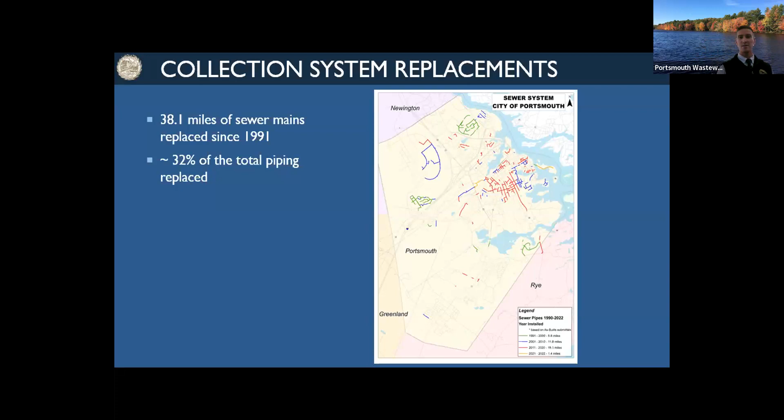The next thing we have is we'll understand a little bit about pump stations, which is a topic we'll talk about later. What are pump stations? They take water from one zone and pump it somewhere else. A lot of times we try to use gravity to move the water around, but you get to the point where it's too deep in the ground to be economical - our pipes should only get 20, 30, 40 feet deep. So what we do is put in a lift station, which lifts the water up higher so it can then flow by gravity to some other zone.

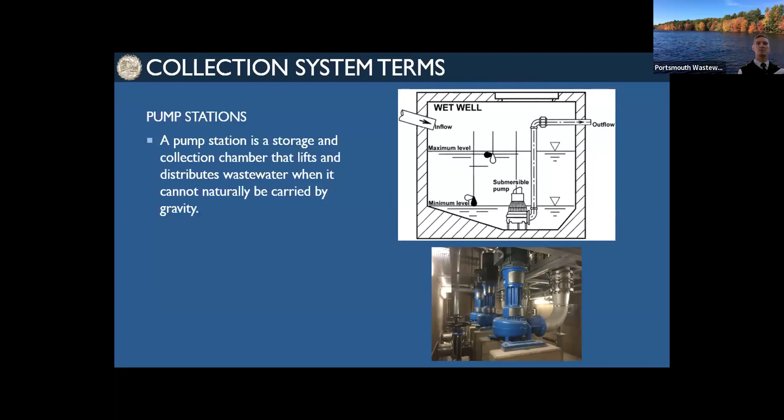We have about 20 stations, and we're going to add a couple more in the future. These are big assets that Shane has to manage all the time. They have recurring costs, require maintenance, and are labor intensive to manage.

All right, so combined sewer - this is a big hot topic. We want to just define the terms. It's a combination of stormwater and wastewater that all goes to a common pipe. Most of the time it flows right to the wastewater plant, and that base flow, up to a certain amount, gets treated and captured.

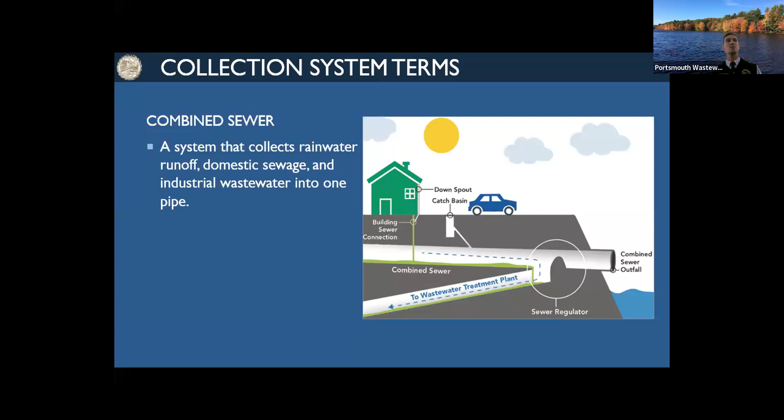What happens in a CSO is the system gets overwhelmed. This is one pipe in the ground, and a lot of these are antiquated, so they don't have the capacity to convey all the stormwater and wastewater flows. So a portion of that gets discharged to receiving water - in our case, the river and the mill pond. This is a problem for a lot of communities in the US.

There's over 700 communities with CSOs, and we have some good information on our website about our compliance and how often we've had CSOs. We have some new notification systems and new dashboards so the community can be more aware of the real-time status of our system.

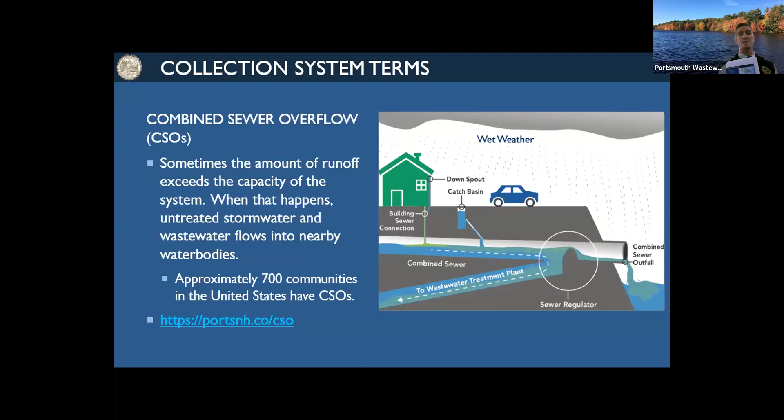I think a big question we've been getting is why do we still have CSO events? We've put a lot of money and investment into the system - why do we still have these events?

What we've been seeing is more frequent, intense rain events - that's intensity. If it rains all day, often it's not a problem; it's when you get 2 inches in an hour that it overwhelms our conveyance system, because we still have these antiquated pipes that aren't capable of conveying those flows. The reason for the CSO point is to have a relief point so it doesn't come out in basements or in the street. If you don't contain it and direct it to a location, it's going to come out where you don't want it to.

So what's discharged during a CSO event? Our base flows are about 2 million gallons per day, and in a wet weather event that goes to the treatment plant is about 6 million. So 90% of this CSO water is actually stormwater, and most of the wastewater itself is water anyway.

That being said, what's coming off in these CSO events? You have wastewater, which is a fraction of it, but then you're also getting road runoff, fertilizer runoff from parks and other grassy areas, and pet waste getting washed out. A big concern in a lot of communities is wildlife near these water bodies - geese and other waterfowl become a real problematic thing when you're looking at beach closures and contamination of water bodies.

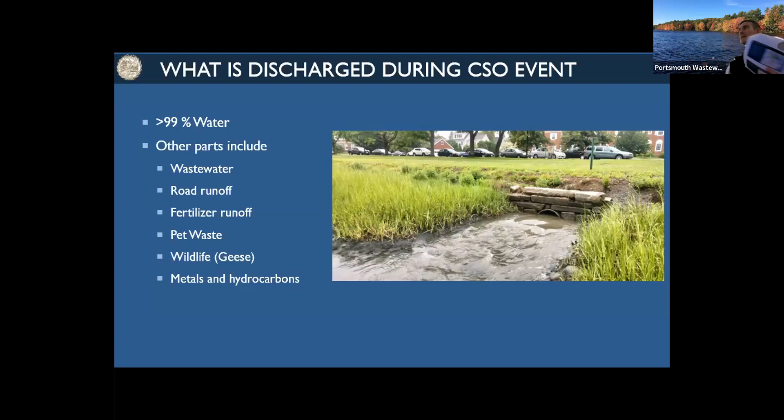It's a fun fact that a goose can produce 1 to 1.5 pounds of fecal waste per day, so when you think about the amount of geese we have around here, it can become problematic. Then there's also metals and hydrocarbons from runoff off roads and streets. So all of these are constituents of CSOs - it's not simply wastewater.

Just another fact, as we were putting this presentation together, typically in this South Mill Pond area, for every inch of rainfall we get about 3.7 million gallons of stormwater runoff in the basin. So there's huge volumes of runoff that are generated in this area.

Okay, we're going to go through some of the projects that we've completed in the area. Combined systems are the primary driver of these CSOs. We have a lot of combined systems, but as you can see, we've really taken care of a large majority of those combined piping systems. A few of them are still ongoing.

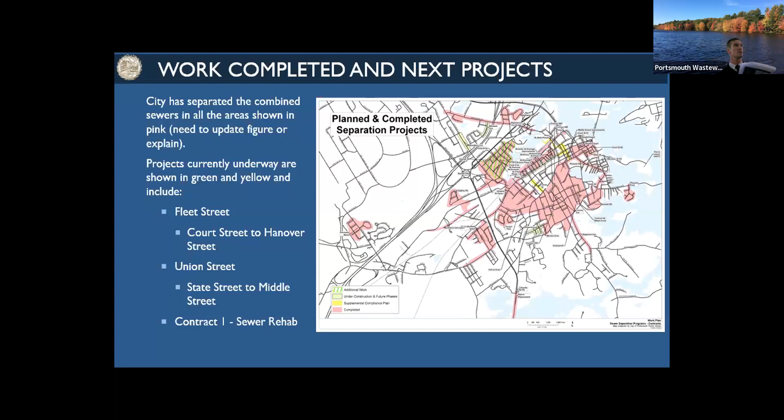So being systematic is important, because it's better to evaluate what data you have, plan a project, but then come back and see what the results were. Because a lot of times there are other things that are still contributing to CSOs or other CSO events.

Just a couple facts on how we've progressed over the past 20 years or so. Since 2002, there have been 28 major sewer projects. There's a whole number of smaller ones, but about $194 million of total sewer capital investments. A lot of that is in the Pierce Island wastewater treatment plant.

But approximately of that 194, about 70 million is CSO related, CSO specific. That would be separation projects, infiltration related projects, things like that. And as you can see from this, there's approximately a 90% reduction.

It depends really on the weather patterns. In the early 2000s, you see some very high events, and they were kind of wet years. But also the data, as you get older and older, we didn't have good data to understand what the volumes and flows were. I think what I heard is that there was a kind of board that they used.

So if it got moved, that was the indication that there's a CSO. Nowadays we have better technology, better tools to understand what's actually going on in the system. But it does show you that we have been working to steadily address some of these CSO flows and events.

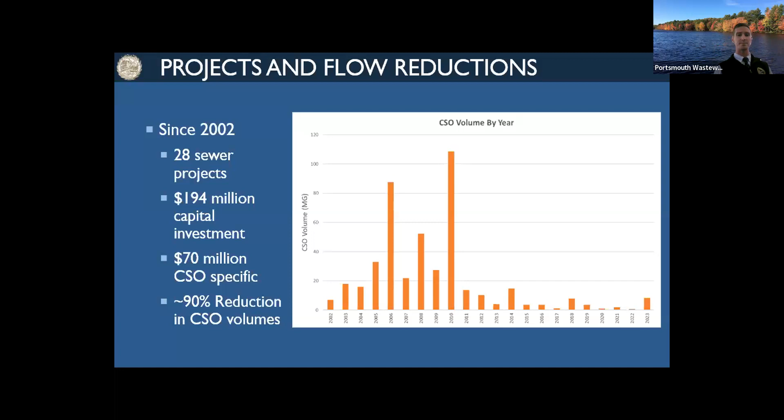But there's been a significant reduction in street flooding and also basement flooding. This wasn't like a thing that happened once a year, this was happening very regularly based on the precipitation events that we got. So that's an important thing to consider, CSOs are not ideal, flooding is not ideal, but in terms of the amounts and frequency, it's dramatically decreased over time.

All right, big one is, so when will CSOs be eliminated? I would say we don't have a firm date, we can't put a pin on it and say it will be done by this date. Like I mentioned before, we have a supplemental compliance plan, which is our target and our framework to work towards removing these CSOs, but it's a long-term process.

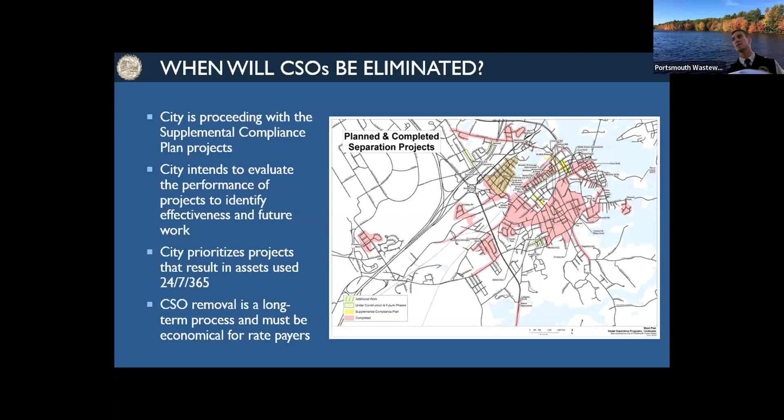All right, so the big one too, and I think we got a lot of feedback on, is how do we get better notifications out to the community? So we have a vendor that helps us with CSO reporting and monitoring. They also manage the rain gauge system.

And so we have new tools available to us, a real-time dashboard on the city's website now. So if you're interested, go to the city's combined sewer overflow website, and we have a real-time map of all of our CSO locations. You can click on each point, you can see when was the last time it had a CSO, what have been the volumes in past periods of time. It's kind of like, has it overflowed in the last 48 hours, and such - those are right there.

We're implementing a new notification system itself. So we're trying to automate subscribers to make sure we don't miss people, and we're getting notifications out effectively. We have systems in place that we can verify it's not false - we had a couple of those where there was a sensor failure. We just don't want to say, oh there's a CSO, but there's really not. So we have some tools in place, additional monitoring and data, that we can say, okay, this is a real thing, let's make sure everyone's aware of it.

They're going live this week. So I think anyone who signed up on our website can expect to get a notification saying, hey, the system's going live. If you want to still be subscribed, great. If not, you can unsubscribe - there'll be a way to do that.

Another thing to emphasize, and I know we get some comments on it, is the old systems - they met our regulatory and reporting requirements. So it might not have been the preferred notification method, but we still met our requirements. I think there's always room for improvement, and I think this is a good tool where we can get a little bit more information out to people and be kind of responsive and respect people's requests.

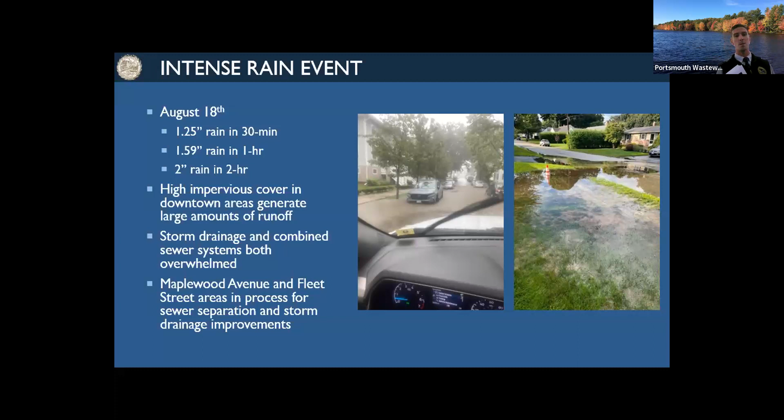Next is the Mechanic Street Pump Station. This has taken up a lot of our city's time and our staff's time. It's the city's biggest pump station, and it's been a real challenge. I think it's a visible mark that we're having some issues in our conveyance system.

This station was originally constructed and has had a series of upgrades in the 70s, the early 90s, and then the 2000s. Right now the current big pumps are about 500 horsepower, manufactured in the early 90s era. We've had some pump failure issues.

Right now we ship them offsite. I think a lot of the community was notified. These are big pumps - this is just the motor and impeller, the upper unit. They got shipped off-site. A lot of these parts are made in Germany, handmade or custom manufactured. Some of the parts were taking 4 months, some have taken up to 6 months.

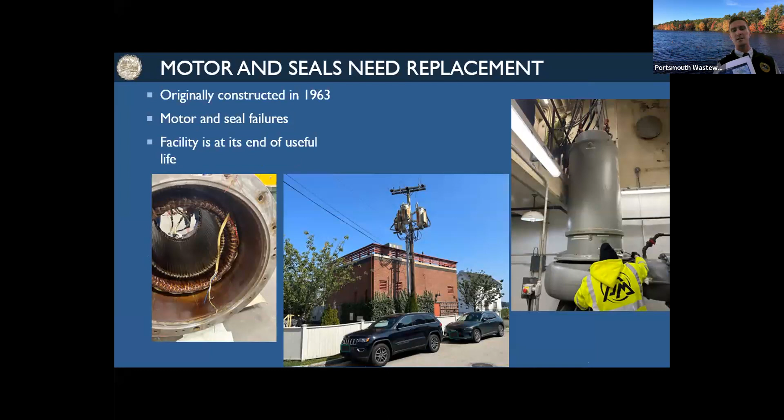The rebuild is in process, but as we're rebuilding, we found some additional electrical issues. Going back to this stator, each one of those little wires - there's thousands of them - is hand wound by hand. That's still in process, and it's projected to take another 3 months, because this is custom stuff where you're slotted in the queue with hydropower generators and a bunch of these weird one-off custom pieces of equipment.

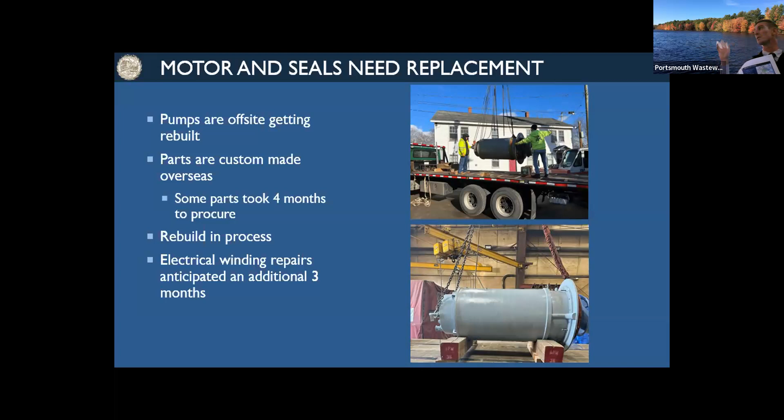In wet weather, the flows come up and we need to pass additional flow, that's where it is. The tarps there are a little unsightly, but they have insulation and we have heat trace wires to make sure the pipes don't freeze. It's not ideal, but it keeps the pipes flowing and ensures reliability of those specific units.

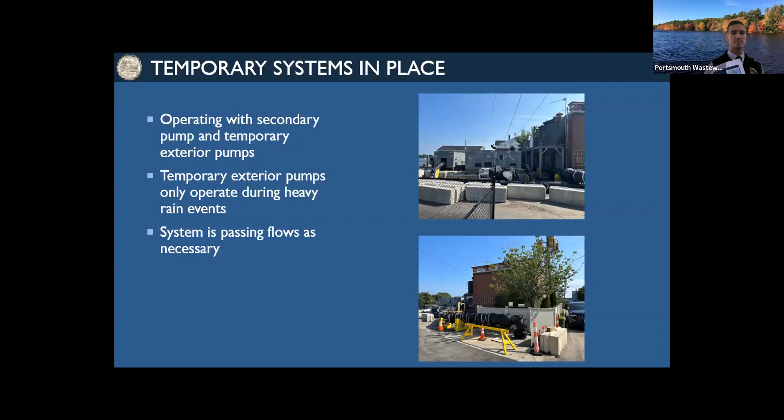It was unfortunate, an untimely failure of the equipment because there's a current project underway - we're at the 90% design level, working on parts repairs, upgrades, and reliability improvements at the site. This is sort of an extreme failure example. I think what we've learned is that probably a more comprehensive upgrade is necessary versus just a parts or electrical component replacement.

So I think right now we're recentering our path forward and probably need a more involved public process to define a bigger CIP project for us. This will come out to the community, and we'd like feedback on our proposed options forward. Right now we're trying to get the parts replaced just to get the facility back online, but then we'll come back out and talk more about a possible comprehensive project.

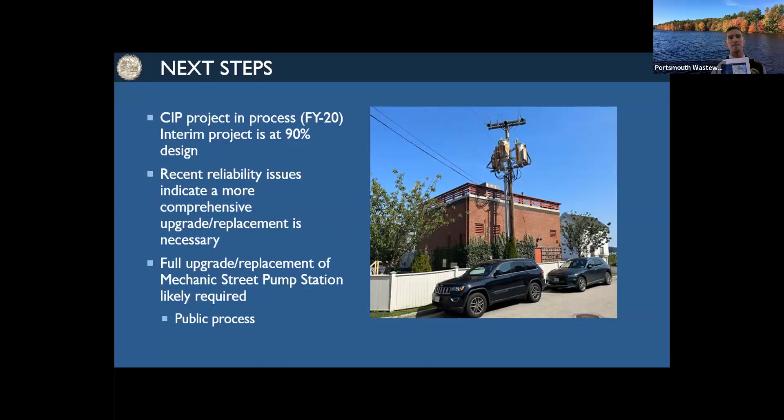All right, so we're going to jump over to treatment systems. This is talking about the Peirce Island plant specifically. I think there's been some comments regarding that. So, why do we have treatment plants?

This is taking wastewater or combined sewage and treating it from a dirty place to a clean place. That's to remove particulate matter, rags, flushable wipes that shouldn't be flushed, sands, grits, and rocks from the water. We get those removed in the early phases, and settle out organic material in those two big clarifiers.

It's something to note too that those clarifiers are original to the original plant, I'll compare that a little later, but we're really trying to remove the pollutant components and concentrate that treatment in one spot for discharging to the water body.

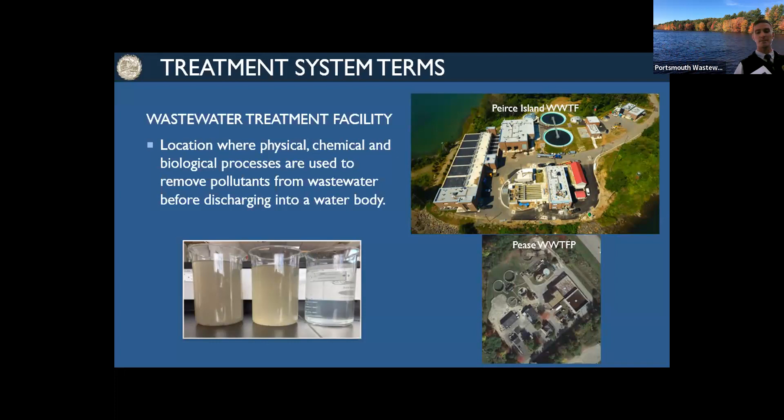In terms of spatially where these things work: Dave's here and he works out of the Pease wastewater plant, over in the Pease Tradeport area. That treats mainly the Pease Tradeport and a few other customers around there, and discharges all the way up to an outfall river up there. Then the Peirce Island facility covers most of Portsmouth and discharges right out into the channel there. And then those are the 3 CSO locations.

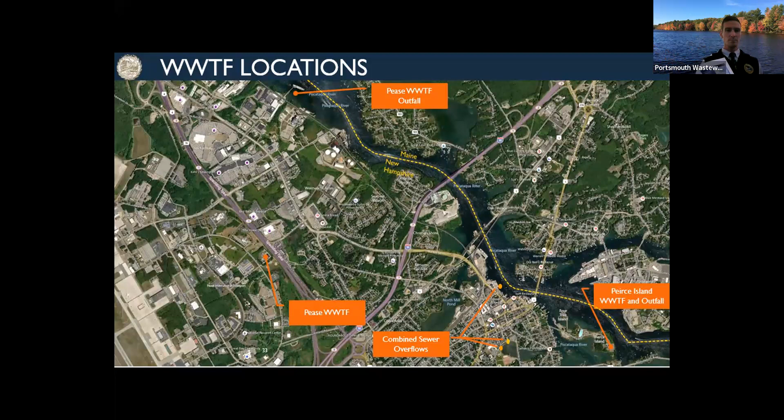So the Peirce Island treatment plant was constructed in the late 70s. This is just a comparison - that's the new plant on top, and that's the old plant too. There's a lot of similarities here.

When we talk about some of these facilities, this is a 24/7, 365 facility. When you do these upgrades, you can't really take the treatment offline, so most facilities undergo a series of upgrades over time. The new facility has a capacity of about 6 MGD to do secondary treatment. The original plant was just primary treatment, meaning it went through clarifiers and then got disinfected and discharged. It has a wet weather capacity of 21 MGD.

This is where the system operates in sort of two modes. The first mode runs all the way through the facility, gets disinfected and discharged. In wet weather mode, the 6 million gallons goes through full treatment, and then a portion of that flow goes to the primary clarifiers, gets disinfected and discharged.

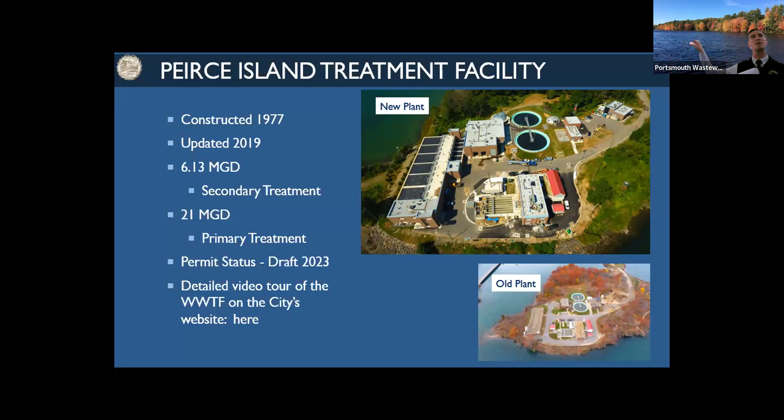Right now we have a new draft permit, not in effect yet. But we have a good detailed video tour from when the facility went live, that's on the website - I didn't put the link in there, so I will update that link in case you're interested in the fly-through of the site. It's a really cool video, and we can't do it justice. Just talking about this site would be a couple-hour presentation in itself.

The Pease Treatment Facility - this slide here is a little busy, but just to show, this is very similar to how Peirce Island is. It's a patchwork of various upgrades over time. This was constructed in the 50s for the Air Force, and updated over various periods. It has a 1.2 MGD design capacity, and we have a new active permit which gives us a little extra capacity for future growth.

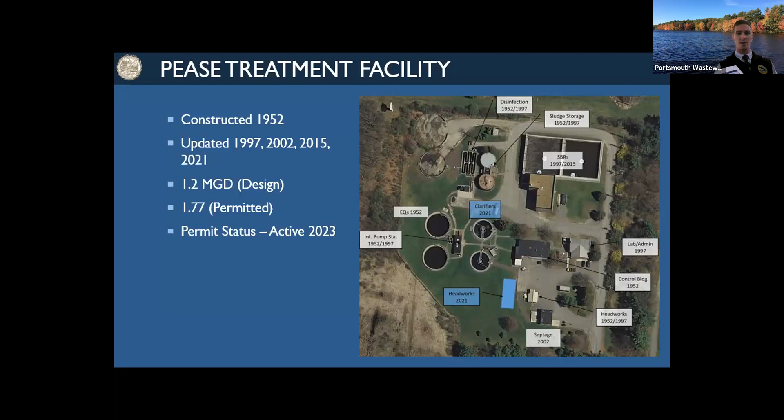So you can see it's a little bit of everything, but these are our 2 treatment facilities, and they're currently ongoing - we never stop treating.

Okay, so how's the Peirce Island wastewater treatment plant doing? I think that's been a question we have. Since the upgrade, we have dramatic performance increases. This is going from a primary treatment facility, or chemically assisted primary treatment, to a secondary treatment with a high rate filtration system. You can see order of magnitude improvements to suspended solids and BOD, biochemical oxygen demand.

So BOD is kind of a weird term actually, we didn't really define it, but essentially it's like if you put all this wastewater into a water body, how much oxygen do the bugs or bacteria take and consume? That's what usually leads to fish kills - you see fish kills in receiving waters, that's usually because of BOD, because there's a big algal bloom and all the microbial growth happens and it sucks all the air out, and then fish or other organisms struggle.

And then the big one for us too is nitrogen removal. We've decreased total nitrogen coming out of the back end of the pipe by about 75%, and this is really helping estuary water quality. I think both facilities have really seen dramatic improvements - on the Pease side it's been operator improvements, and at Peirce Island it's been a lot of technical improvements.

All right, so I know this has been a hot button one. I think I mentioned it at one of the council meetings. So the primary clarifiers,

There's a scraper mechanism inside there. So when the solids come in, the clarifier acts like a big wide spot in the pipe. The water comes in and all that stuff settles down, the solids settle out to the bottom. And there's this rotating scraper at the bottom that directs all those solids to a point in the middle that

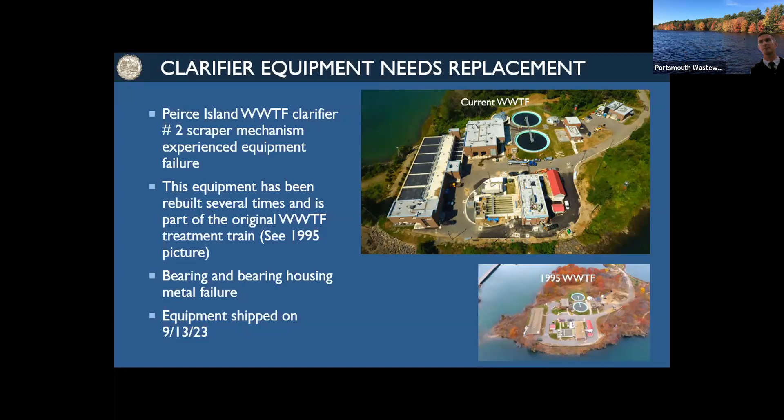All right, so how has the performance been impacted? So this happened sort of in the January timeframe. So we have data here. With these facilities, they're 24 hours a day, 7 days a week, 365. We built in redundancy. The reason for having 2 clarifiers is you can operate off of 1 clarifier, or you can even operate in other scenarios. But you can see here that our treatment performance has not really had any changes.

Really, the impacts have been to the community. It's because we are using that tank in a non-standard scenario, so the wastewater sits in that tank a little bit longer before we can clean it up and wash it down. That's why I think some people have smelled some things. We're trying to really work on making sure it doesn't go septic, but it happens pretty quick in wastewater.

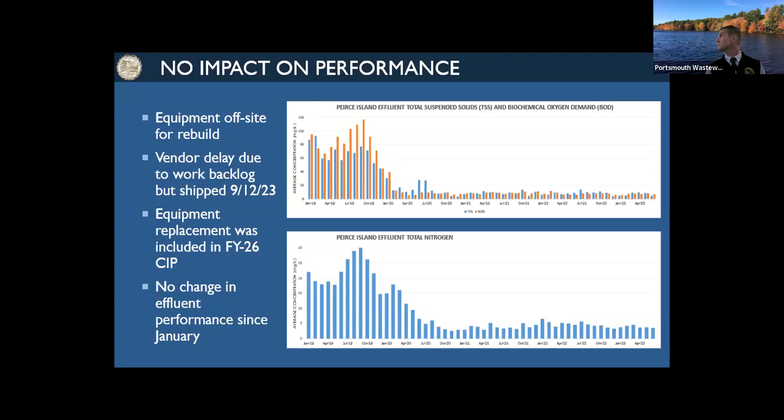Next slide. All right, and I think another question we've been getting is, do we have capacity for new development in the city? There's a lot of new construction. Can we handle it? I think in terms of capacity of our treatment facilities, yes, we can. They were designed for growth in mind.

And then Pease also has additional permitted capacity available if we do need it there. But the big takeaway is our sewer use trends have been down. We're getting less. There's about 10% less sewer use, and we have about 10% more customers. So as you can see, the new development hasn't really been adding new sewer capacity requirements to the system. A lot of that comes through more efficient fixtures, toilets, showers, things like that.

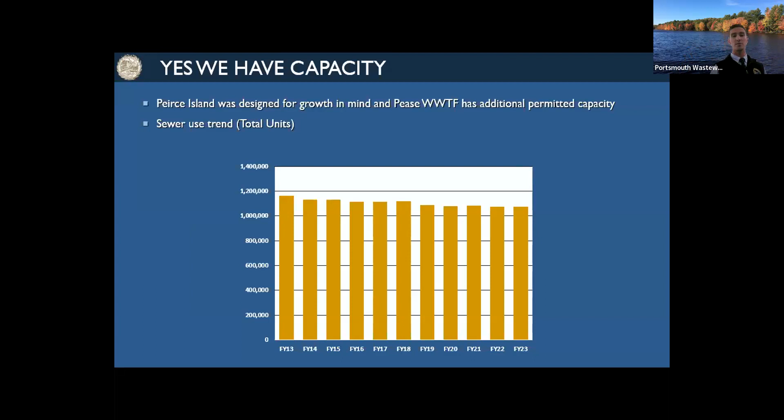And it's an important thing to note that all these commercial buildings or apartments and other things, they haven't been increasing the flows to our conveyance and treatment system. All right, and I'm going to hand it over to Brian. We're going to talk a little bit about how do we pay for this work?

How do we make sure it's cost effective?

Great. Thank you, Eric. That's a good segue to mention blue. So we are saying think blue. And that's one aspect of water, wastewater, stormwater, getting the message out there about water efficiency.

So I think we can attribute a bit of the reduction in usage to how much our customers have really worked on water efficiency. I also want to say, Eric's been with us 9 months.

When he came here, I think he knew where Portsmouth was, but he didn't know anything about our wastewater system. So you could walk away from this meeting going, you got to be kidding, and maybe that's why we put him on the hot seat to make the presentation. So we'd have to really learn this stuff right and left, but it's amazing. And we're very fortunate to have him with us and his experience too. He was in Seattle for 10 years, managing their pump stations there.

So, anyway, it says I'm muted, but I don't think I am. Am I muted, Monty? No.